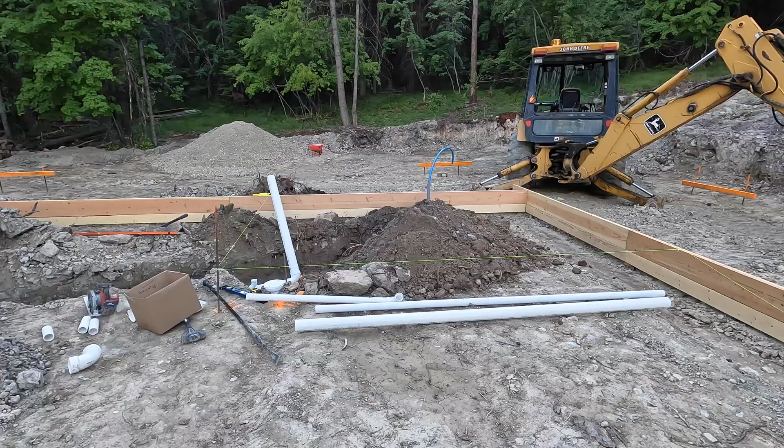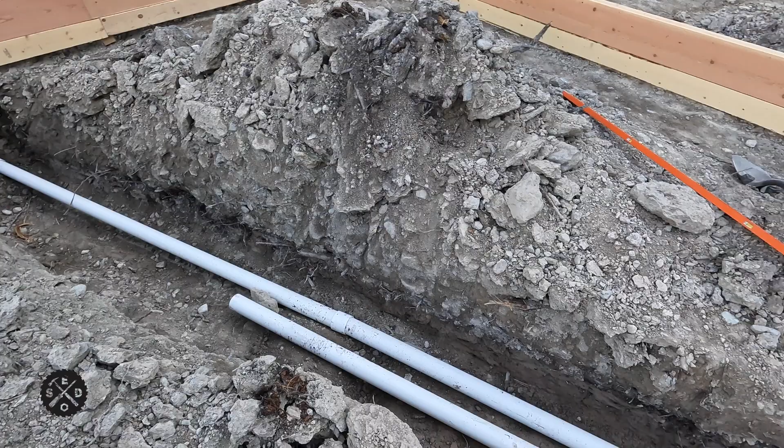Welcome to episode 6 of Building My Garage. So today I'm going to be digging in the plumbing for under the concrete slab. So all this prep has to be done before anything else can get done. So I wanted to kind of walk you through some of the process of how I'm doing it. Be sure to check with your local building codes to see what requirements are in your area before you do something like this. But hopefully this will give you some ideas of the process that I went through.

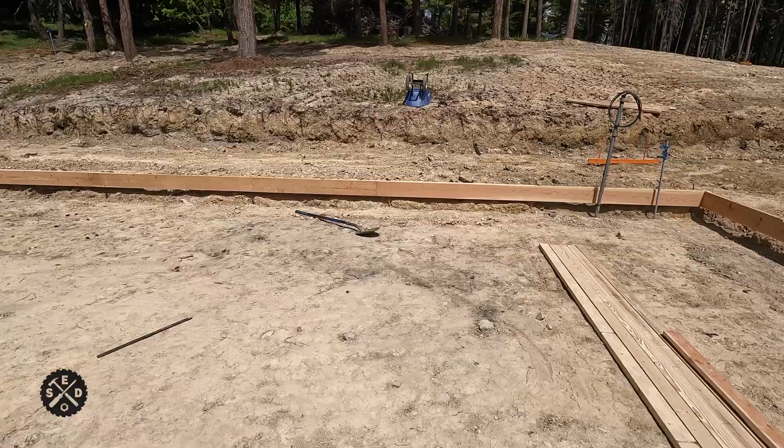Okay, so while I'm waiting on getting some more pins and stuff to finish up my form boards, what I decided to do is shift gears here a little bit and think about plumbing. I am going to have a bathroom in here with a stand-up shower, a toilet, washer and dryer hookup just in case I want to do that, for washing dirty clothes out here, and I want to have a utility sink. So that's the main things I'm going to have.

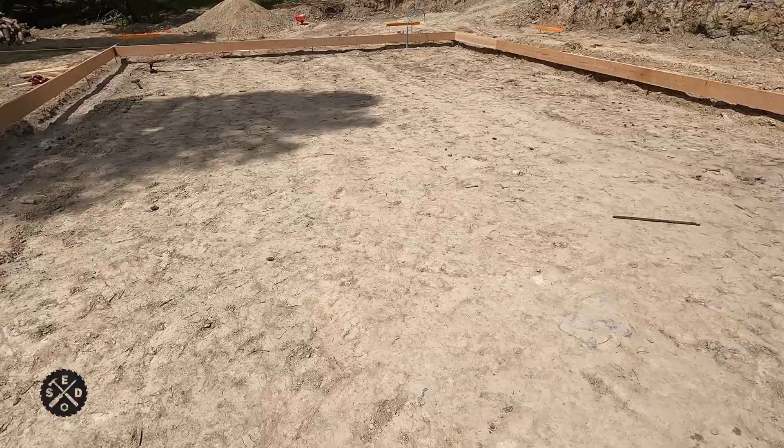I do want to have a floor drain under here where I'm going to have 2 garage doors in the front here, and I want to have a floor drain somewhere close to where the cars are going to be parked, 2 of them here. So here, it's kind of bright and sunny out here, and I'm not much of one for digital drawings. Never was good at that. So I just did a hand sketch here. Hopefully you can kind of get the idea here.

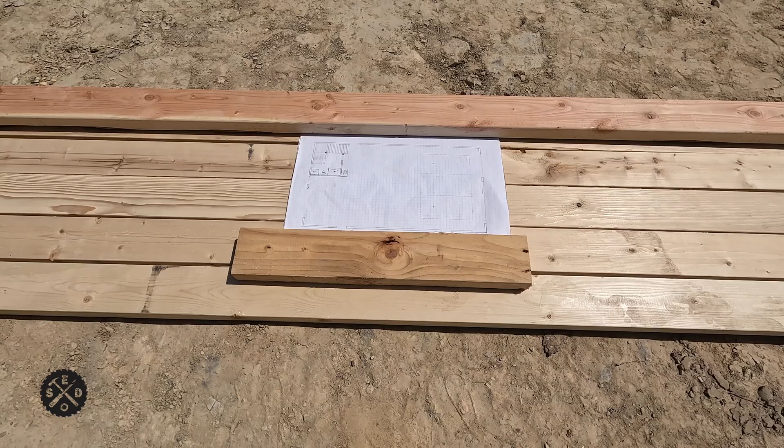Okay, so it's super windy out here. That's why I have this blocked here with 2x4s. But I wanted to show you a little bit here. So this is my floor plan layout. And then here I kind of sketched out where the cars will be parked. So I want a floor drain here, floor drain here. Over here I want a drain for the utility sink and the stand-up shower and the toilet here and the washer and dryer. And I'll probably do some kind of a drain back here in the mechanical room.

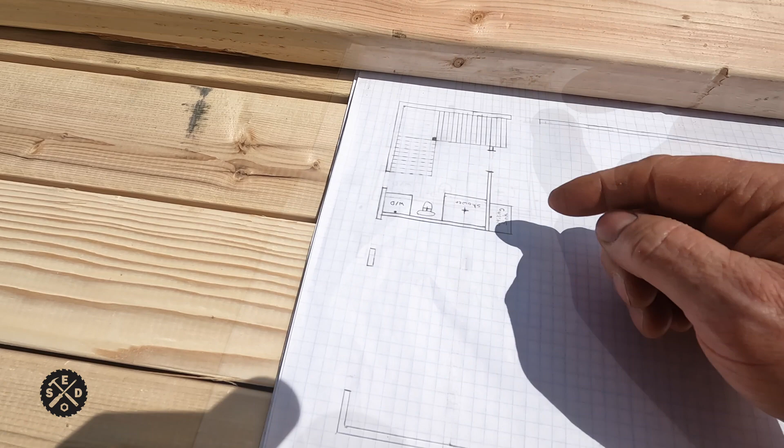It kind of just symbolizes the stairs going here. It's going to have a landing and then turn and go up, because upstairs I just have the center part of the building that's going to be used since it's an attic style truss. So that's why I'm doing this the way I am. So I'm going to get set up and get that laid out.

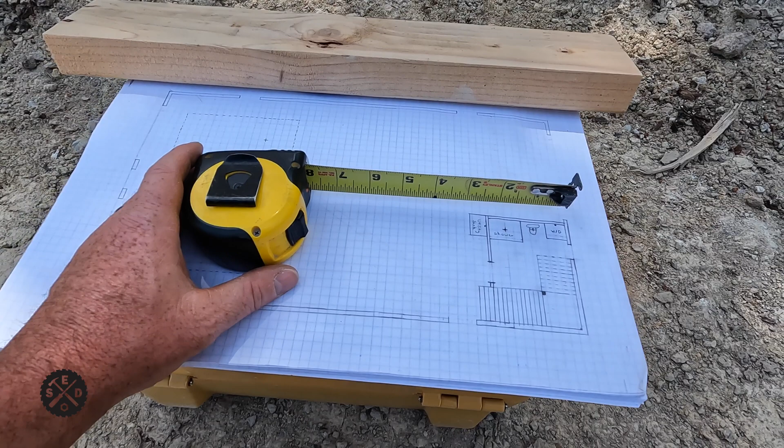Okay, so I moved to a less sunny location for doing this, and of course it's windy, so I still have to hold this down on that edge. But what I did is just use large graph paper, and I did 1/4 inch per foot layout on this. So what I can do is just reference off of the outside here. This is a drain kind of in the center of the washer and dryer towards the back side of the wall. Utility sink as well.

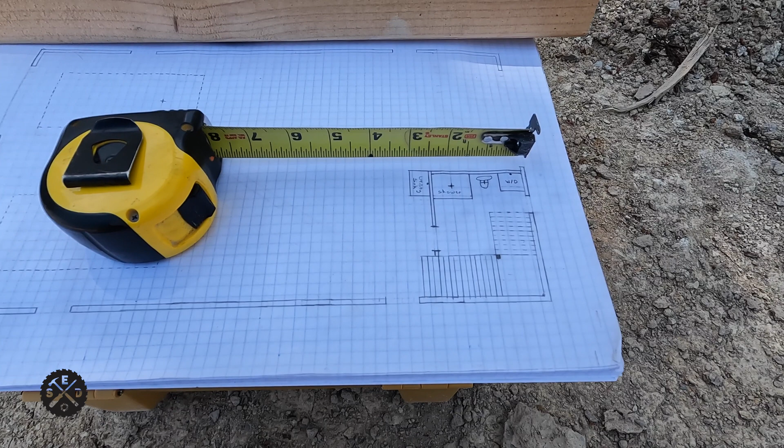I'm going to try to do that on the back side of that one. Then I got the toilet centered in there. So I'm going to try to reference this as close as I can. You can fudge the walls a little bit sometimes if you have to, like a little thicker wall or something, things like that, but try to go as close as we can.

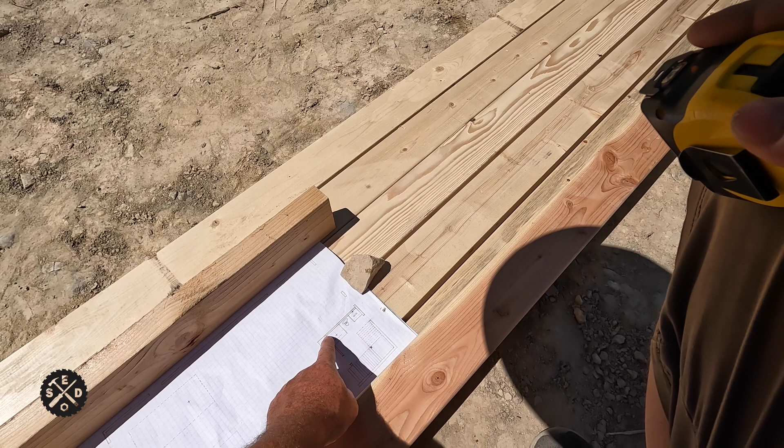Okay, so you probably saw me doing a little measuring earlier. This right here, I got this weighed down good because it's so windy, so I wanted to show this. So yeah, I want 14 feet from the outside here, 14 feet to the center of this wall. That's what I'm going to do for reference, because I want this plumbing to be inside the wall. So that's what I'm going to do, is measure that.

So just to show you really quick how I would do that. In my case, since the outside of the building is going to be 1.5 inches back from there, I'm going to measure outside just so I have a good place to reference to. So there's 3 inches, so I actually have to go 14'3" to the center of my wall.

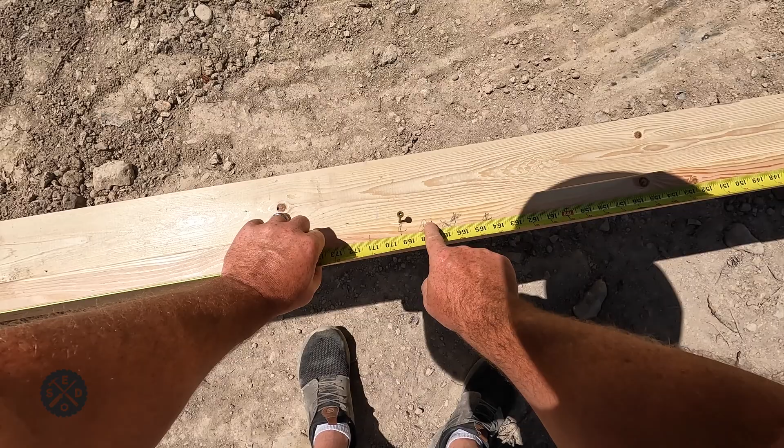So this is the outside of the wall, so it's a 2x4 wall, 3.5. So this is the center right here. This is where I'm going to hook my string up. So now I got to figure out where this wall is going to go. I could do the 1/4 inch per foot. We'll just go with an even inch so you can see there.

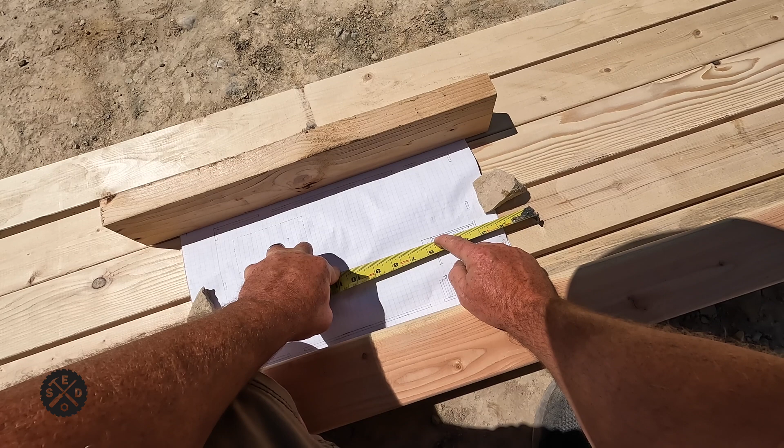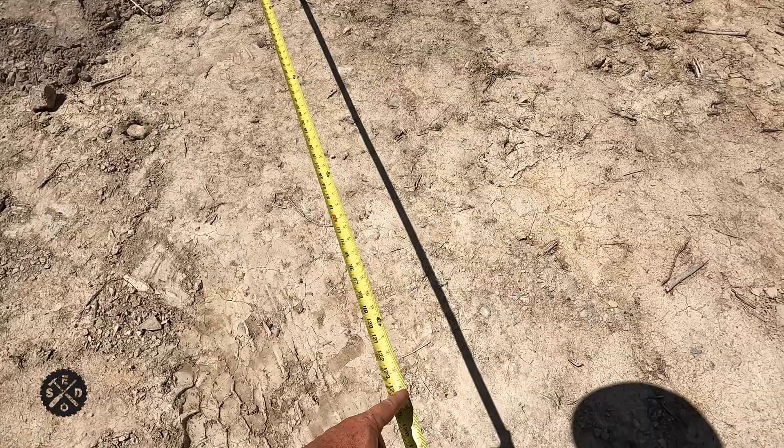So that's 4, 8, 10. So from the outside right to here is 10 feet. So that's 10 feet to this side of the wall this time. Now I want to go 10'3" since I'm hooked on the outside of that, plus the 1.5 inches. Hopefully that doesn't confuse you. But now I got to go 10'3", and this is where I got to put my stake, and I'll double check the length this way. That's how I figure out exactly where this wall goes.

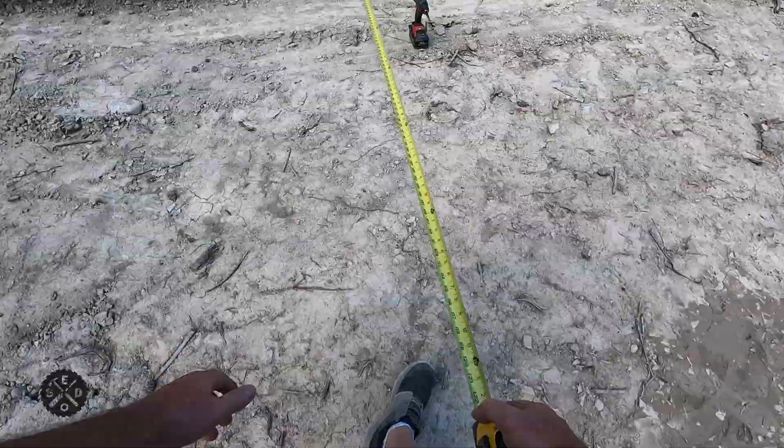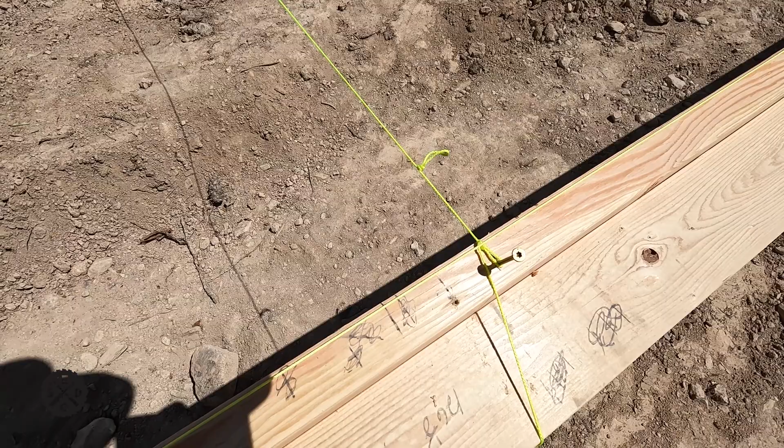So I ended up doing a little different. I ended up going to the outside of the wall instead. You can see right there. So the example that I showed earlier, going to the center of the wall, I decided to go on the outside because I was thinking about it. The center of the wall is where the pipe's going to go, so the string is going to get in the way and going to get pushed around.

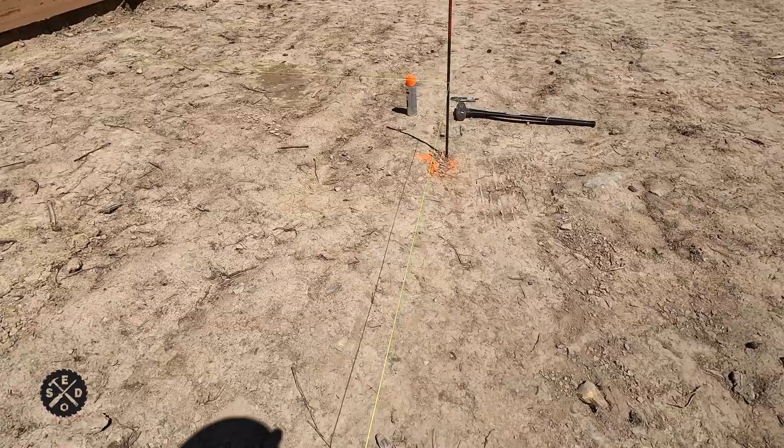So this way I decided I'm going to stay on the outside all the way around, so I do it the same every time. So this is the outside of the bathroom all the way around. So I know that the center of the wall is going to be 1.75 inches since it's 3.5 inch wall. So that's where I got to shoot for to put my pipes. So a lot of random stuff going on out here, but I'm working on getting the plumbing laid out.

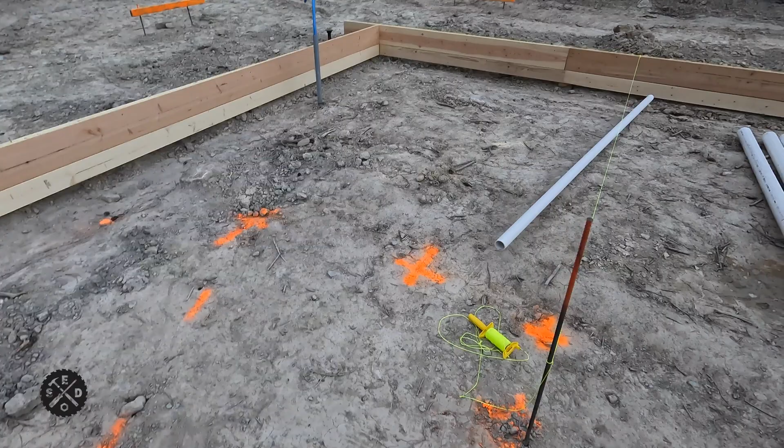What I'm doing here, I think I showed you on the thing, but utility sink, drain over here. This is where the wall is going to go. I marked this wall out, which the string is down temporarily right now. But I'm going to do a stand-up shower, then I'm going to do a toilet, and I'm going to do a washer dryer. This line right here is a septic line going out, and right over the bank there I'm going to do a vertical step with a clean out down there to the tank.

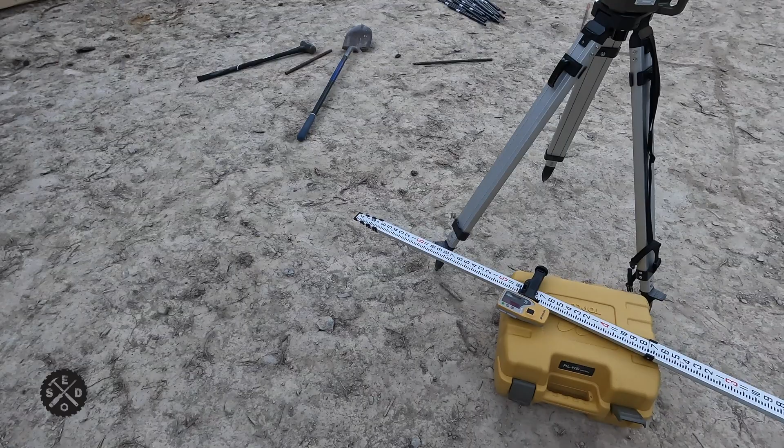And so right there, I know what the distance is in this. It's 45 feet. So what I did is I used my laser transit, this handy thing right here. I don't have it turned on at the moment.

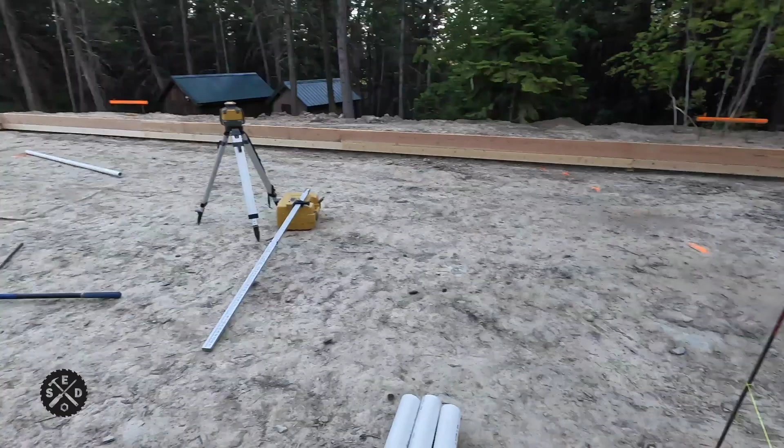When we did the house over there, I did the plumbing first before doing any of the rest of it. But for this, I decided I'm going to try to do it. And this one's not quite as big, so I think I can reach. So for this part, I'm going to try to reach for the first couple of feet, maybe 6 feet of this, and then I'm going to reach the rest from over there.

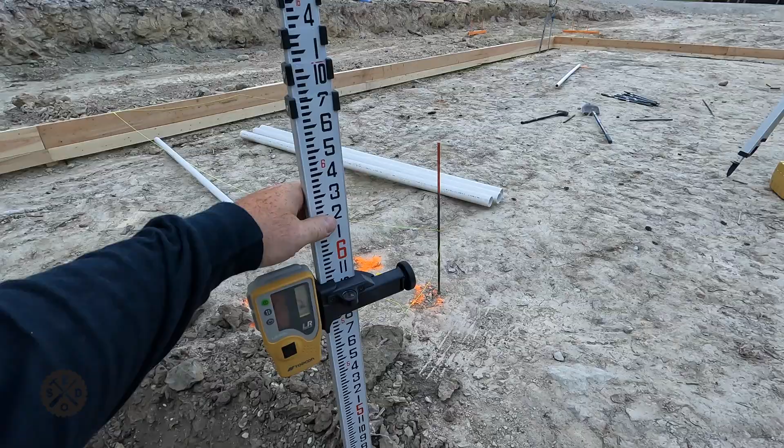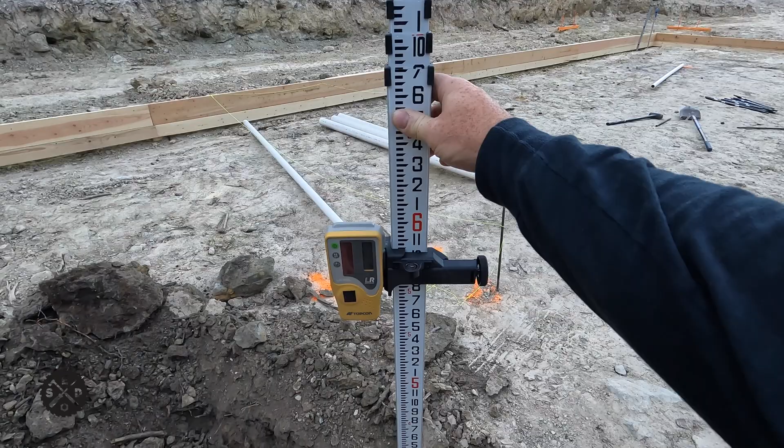Now what I did in this case, since I knew I wanted to go down 2 feet all the way out through there, I found out what the grade was before I started, and then I set this 2 feet higher, so that way it goes 2 feet lower. You can tell I'm pretty much right there. So now what I'm going to do is dig a little ways, and I'm going to adjust the transit according to the distance I go. So I'm going to kind of check the grade as I go.

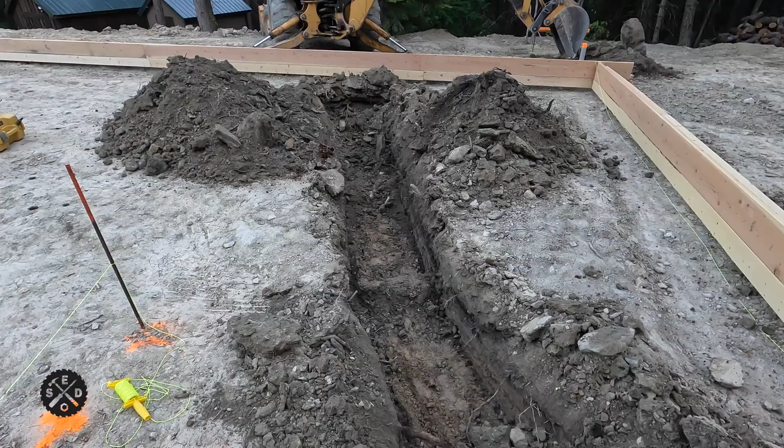So if I go out, say dig 10 feet out or so, then I'll know that I need to go down another 2.5. So later you'll have to do some hand digging to get this exact, but this just gets it pretty close as you're digging along. So you can see where I started there. I couldn't quite reach with the bucket, but I can get that by hand easy enough. So I went out about 10 feet and moved the grade stake 1/4 inch per foot to that location and right on. So I'm going to just keep digging.

Going to be really careful around that form there. Probably going to do a lot of hand digging, so not going to get super close. So that's the one con of having your forms up now. But like I said, the pro is you have the forms in place to measure everything off of. And if you don't have to go this deep, it's a lot more ideal. This is pretty deep. Just keep digging along here.

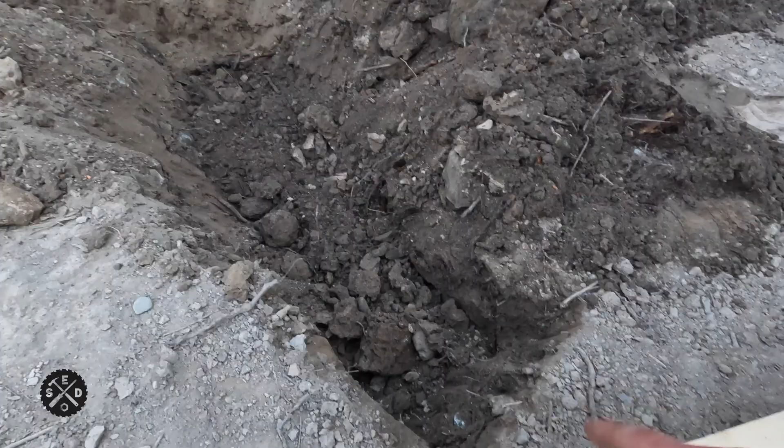Pretty much got everything dug that I want to for tonight. Got that dug over there to the footer. And then I didn't want to disturb this too badly. So I shot grade right on this side, then I came over here. Of course there's some loose stuff. I shot grade on the other side, got that dug all the way out to there. So that's where I'm going to end it for now.

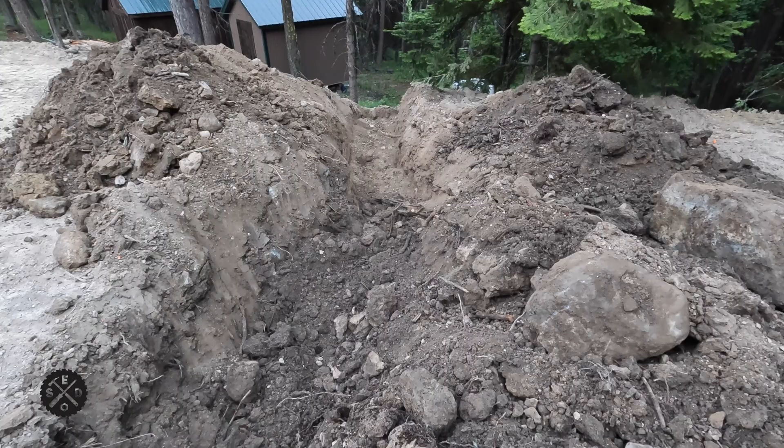So it's going to go down the hill on the other side from there, but that's where the vertical step's going to be. Now I just got to dig all this by hand tomorrow when I get done with work. I'm just working on this in the evenings and weekends for the most part. And then I should be ready to start figuring out plumbing.

So a little bit has happened here. Been working along. Remember I dug over here. This was a couple nights ago. I've just been working on this in the evenings, trying to get this prepped a little more before I show you the rest of the process. But you remember this string line that I had set up for reference? Still here, along with all my other stuff sitting around.

There's so many parts and pieces that you need sometimes, so when you're doing this, get extra and just return it when you're done, is my advice. No matter how many you get though, you're gonna end up going to the store and getting some more, seems like. There's always something. So really quick, you remember how I had said that the toilet was gonna run out by itself?

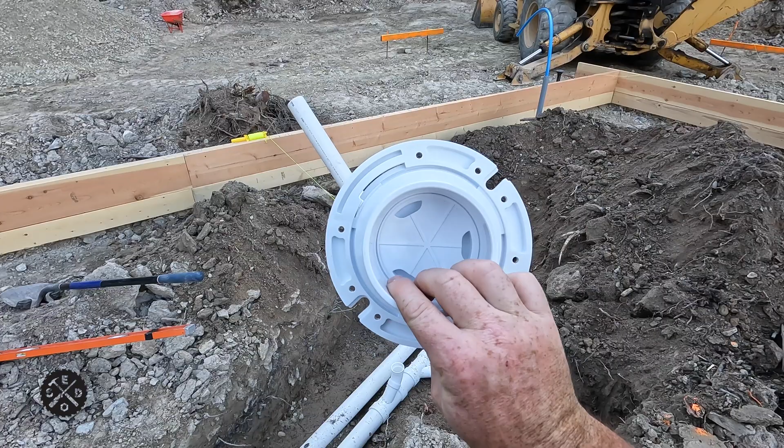So I'm coming up with a 4-inch pipe into the concrete because I want to be able to use this and slip inside the pipe later. The 3-inch pipe can either fit inside or the 4-inch can fit on the outside, which is very common. Since I'm going to run it long and cut it off later through the concrete, I want to get this kind and have a 4-inch so that way I can cut it right flush with the concrete when I'm done, set this on, and I'm good to go. But to do that, you need to have a 4" by 3" if you're going to go to 3" anyway.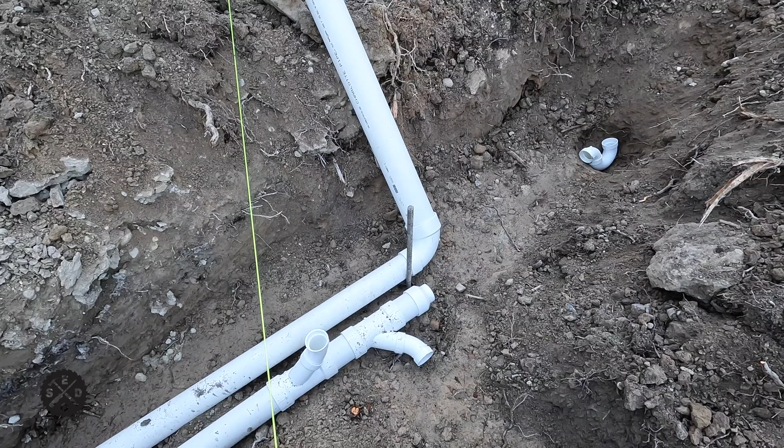For this example, I'm running a 3" line, the one furthest over there, and this is called a closet elbow, I believe, a 3x4 closet elbow, if I'm saying it correctly. I'm just putting this here temporarily for now. What I'm going to do is put another one like that, a Y, 3x3x2 Y, with a street 45 and have it pointed up, and then it's going to be a vent right here. I'll show you a little more when I get done with this, but there's going to be a vent right here coming up to vent this.

Same with this one. This is the other line for the gray water. I want to vent this up here, same spot, right beside it through the wall. Then I'll end up tying them together and go through the attic. Over here is where the shower is. So I'm going to go off to there, and then I'm going to reduce to a 2" and go straight over there for a floor drain in the mechanical room. I just want to have a floor drain back there. And I should never send anything down there that is going to clog it, so I'm not too worried about that.

In here, since you don't want any hard bends to tie the shower in, I'm doing a 3x3x2 Y, then a street 45, same as this one, and it's going to go that way over there. I'm just going to do a 90 there and come up because it's going to get a P-trap below the tub shower, so that'll take care of that. And then this is going to come up, it's going to be a vent. I'm going to come up like this inside once the wall's up, and I'm going to do street 45s off to the side, and this is going to go over for a drain for the washing machine. This is going to go over for a drain for the utility sink, and then straight up is going to be the vent. So that should do it.

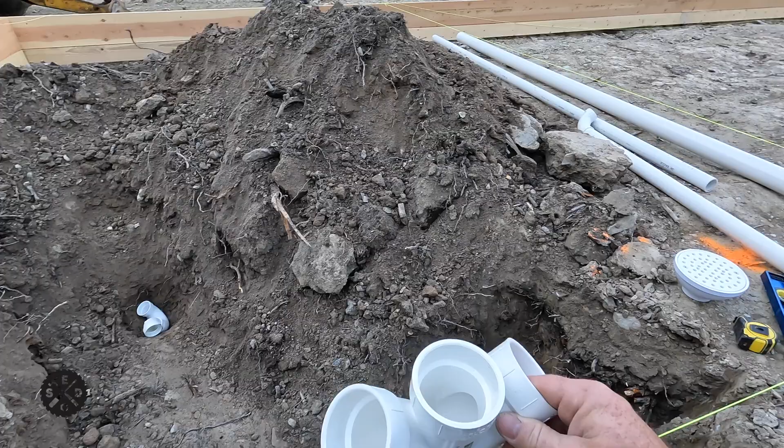So what I like to do is I'm setting this up, I'm just putting some dirt in to kind of fill in to the right height. I've showed this trick before, but I'll show it again.

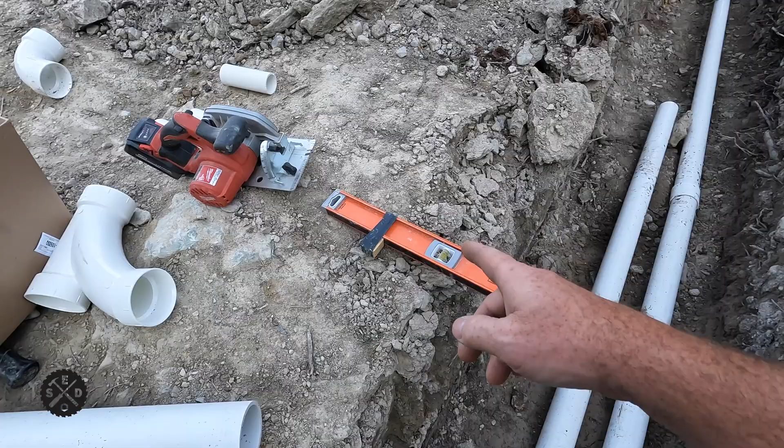So for example, if you want to drop a 1/4 inch per foot, this takes the guesswork out of it. This level is 6.5 feet, so I put the block at 6 feet. But I put a 1.5 inch block because 1/4 inch per foot times 6 is 1.5 inches. So I put the block right at 6 feet, and then on this level, for short runs, a 2 foot level, I needed a 1/2 inch block. So I just taped it there with electrical tape on the end.

So you hold your level right on the upper end, and on the lower end you put the block on there, and then if you're close, it should read right on level. See that? It's really close right there. So if you put the block on, you can read exactly level with your level. So I just thought I'd share that with you guys.

So as I'm going along here, what I like to do is dry fit everything first. Make sure everything is in place before you start gluing anything. Just make sure that everything is going to fit, everything measures out, because you can put these things together. You don't want to put them together too tight, but they do come apart pretty easy. One thing I was going to talk about is when you're dry fitting everything, how do you figure out how to measure things?

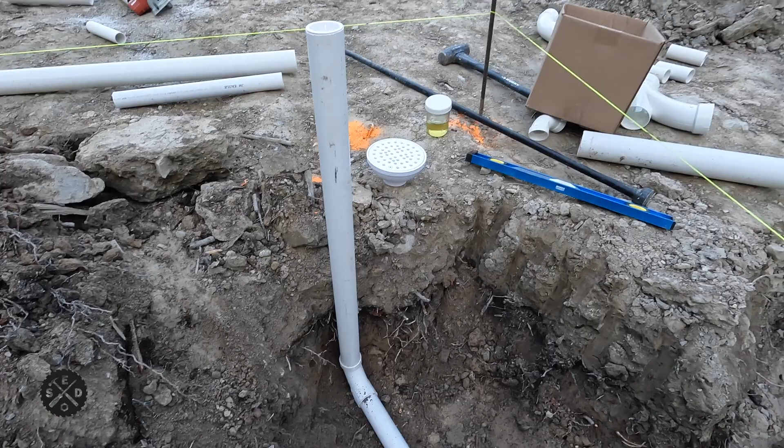What I like to do, say for example here where this shower is, I like to put maybe this upright piece right here with a 90 elbow on it. You want to use a long sweep 90. But what I like to do is set it right there and kind of measure off the string and see kind of what you want. I want 24 to the center, which I have. So then like my example, coming from the outside hooked on, I wanted to be 8'6" to the center, which I'm really close right there, 8'6".

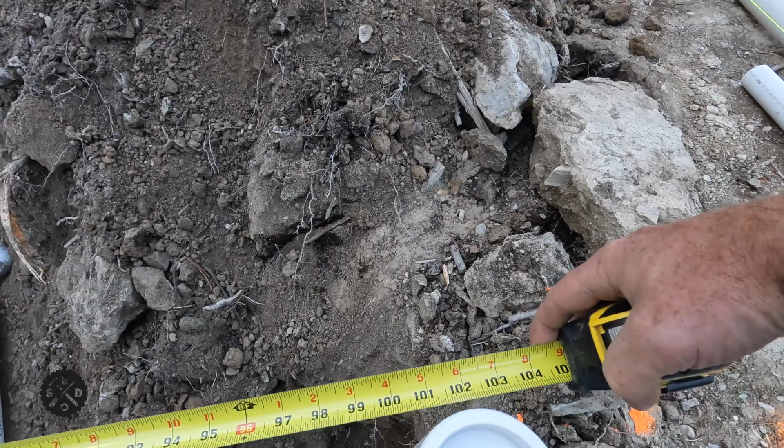So what I do is hold it in place there. When that's sitting right there, you can measure inside the fitting or figure out how far it measures into the fitting. Or you can measure tight in between, like where your tape measure butts up, and you can measure tight on this end. So say for example, that's 26 3/4. Then you would measure what this lip is right here, which is just a little over 3/4. See right there where that lip is? That's where the inside is. And then you could do the same there, figure out what that is. As long as you know this is in place where you want it, center-wise, then that's how you measure.

And so in this one, it goes right into that part there when it's empty anyway, and right to this part. So what I did is just measured right from there to that point, and then I was able to cut that piece once I confirmed that that was in the right spot. So just things like that. Usually I cut the upright part, set it right where it needs to go, and then go from there.

And then this one was the main one that I knew had to go somewhere. This vent is coming up in the middle of this wall. This is going to be a 5.5 inch wall, so I want it 2 3/4 to the center of the string. So I'm really close right there. This has a little bit of movement in it that far up, so I got it really close. So this one I knew I had to place exactly because of this wall right here.

And then this one, I knew I had to figure out where the tub goes, the shower, and so that pretty much had to get placed. But since this can turn a little bit, you can just lay it out there before you put this piece. I had these little short pieces already cut, so I just put some in that I had. What you do is lay this one out on the ground after you discover where this one goes, and then you can measure this in between and dry fit it in. And here I just reduced it to 2 inch so I could get that floor drain. Things like that you have to think about.

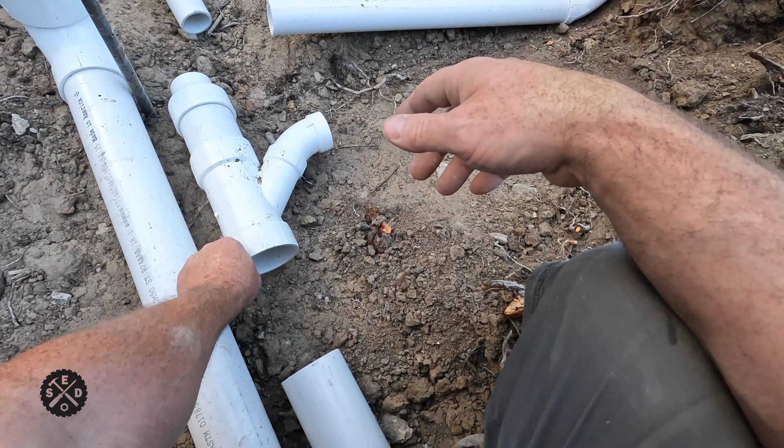Once I get this in here like this, I need to have a slight elevation like this. I would try to get everything ready and then glue the joints all together at the same time. You have to move quickly because it dries fast, but I'll try to show that a little bit as I go along.

So first, like I said, I like to do the ones like this that don't matter, and if they're really dirty, this one's not too bad, but I like to take a paper towel or a rag or something and clean these first, get the dust off of them, because from working on them, they get a little bit messy.

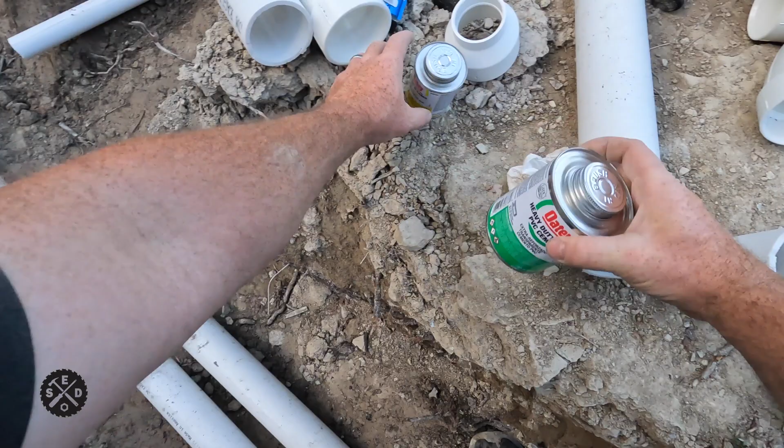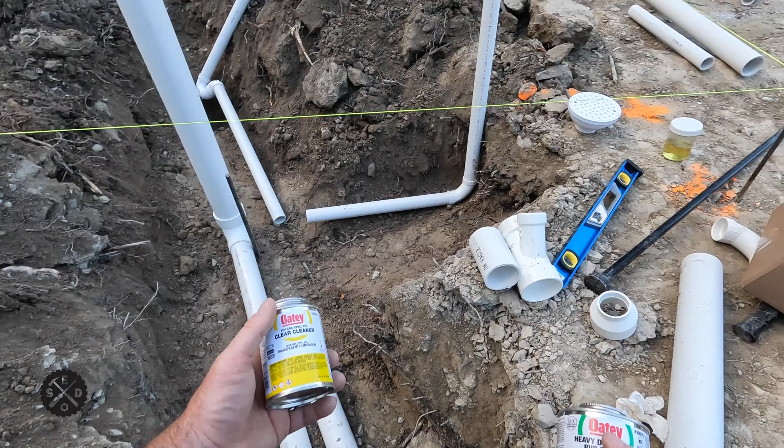So for example, this one, if you've never used glue and primer before, I'll show you what I use. A lot of times, you can use some different ones. I like to do the heavy duty stuff, if possible. I like using clear stuff as well, just because it doesn't make it near as messy. Not that it's going to matter here, because it's not going to be seen. And sometimes inspectors like to use purple primer because they know that you cleaned it really well. That's what the purple is for, so they can see with a glance that you did it.

So for example, you use the primer first and put it in here very generously, trying to get it all over. So you want to clean that really well, and then that will dry. Just in a few seconds, it'll dry quickly. This pipe here wasn't cut the nicest, but should be okay. So you want to clean a good enough area where you know that the glue is going to be in.

Once this is primed, you want to make sure to not get it to touch any dirt until you're ready to glue it. Now I got to set this somewhere. I don't want to get it in the dirt, but I only got so much stuff to work with here. So every connection needs to be cleaned really well. Now you want to close this up when you're not using it. That's all primed, ready to go.

So now I got the glue here. You can be generous with this. You don't want to get too much, but you can certainly be generous with it. Then I like to put it in and turn it a little bit just to make sure that its glue is smeared all the way around really well. And just like that, within seconds, it's set. The only thing you want to make sure is that it doesn't push out for some reason. So I like to hold it just for a little bit.

Sometimes you can put it on the outside here, but I also like to put it inside the fitting. Now if you get too much glue, it just gets messy and gets everywhere. And wow, that bit fast. Now if you're using this quite a bit, you can just set the cap on top without screwing it in. But if you're not going to use it for a while, I'd recommend screwing it because it does dry out.

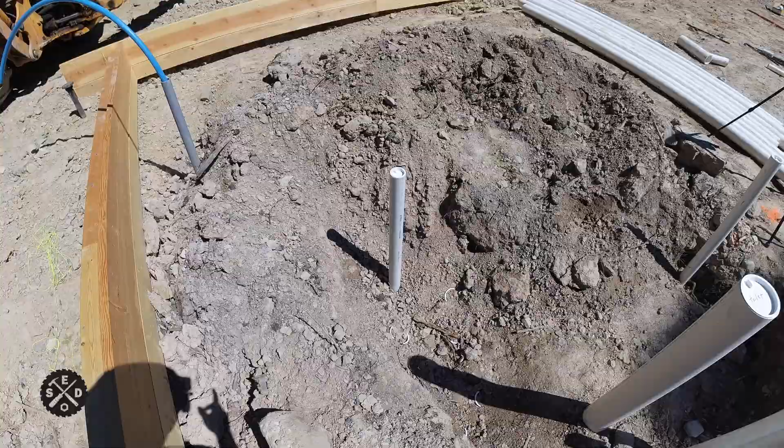Okay, so this is how far I got so far, just to show you in my example what I had to do. So I got floor drain mech room there, which I had told you about. I got the toilet right here, and I got the 2 vent pipes right there. One's going to be a drain as well. This is my shower, and so this right here are my floor drains.

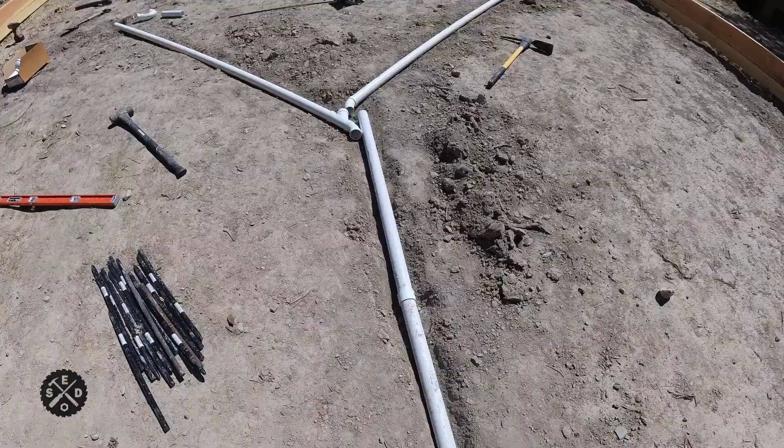So for this, you can kind of see, I just got this dry fit in here, and I leveled it as I went. A little bit extra long here still, but that's what I'm going to do to transition, because I'm going to have a drain over there and one over there for parking 2 cars in here. Figured that should be good. Then I'll have this Y, and that's what I had to do, is just do 45 street elbow here and here to get it lined back up, and that should flow good, I think. So I got everything sloping 1/4 inch per foot all the way down to here.

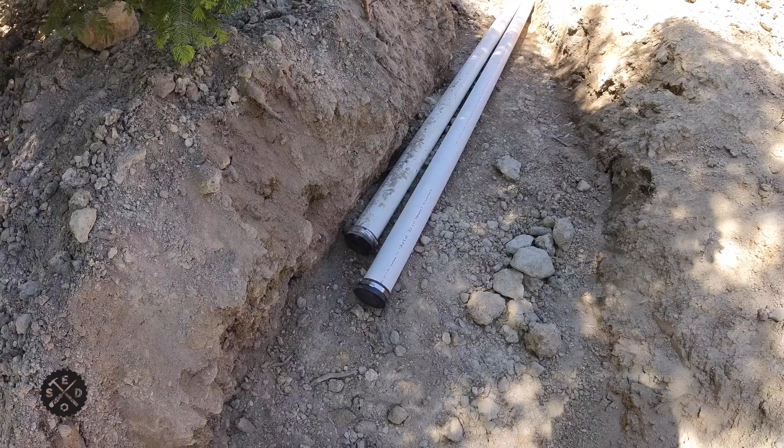Okay, so we ran the pipes out to here for now. I put these rubber Fernco caps on them. You can get regular pressure test caps, the red ones with a rubber gasket on them, but these are a lot cheaper and they seem to hold good, so I'm just using those to pressure test them. So I got the lines coming out here.

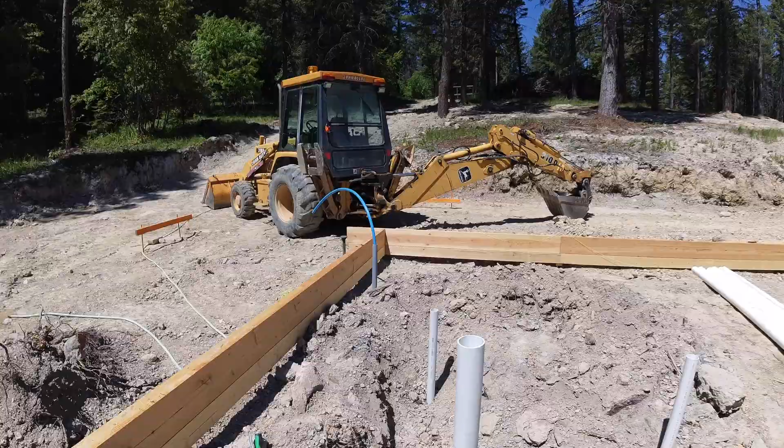So what we did, since I have that new hydrant up there above the backhoe, we wanted to pressure test this. We filled the septic line up, you can see right there, but this is right below it. This is the vent, so this is as full as I could make it. And I'm testing it for a while to see that it's holding, make sure it's not leaking anywhere.

As far as the drains go, I'm actually waiting on FedEx to come so I can decide which floor drains I'm gonna do. So all that to say is, this is the highest point. And since I don't want to put my P-trap yet until I'm committed, what I did is I filled these up. We kind of did it with this till it started coming out, but the water is sitting right there at the pipe. So that's as full as I can make it right there.

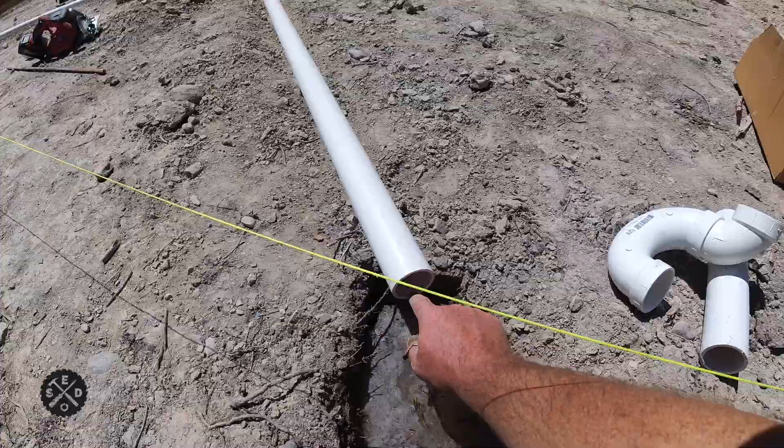So pressure testing it all. It's holding, it's looking good, not leaking at all. So we're gonna let that sit for a while. And then if everything checks out properly, then we're good to backfill.

All right, guys, so earlier I had showed you I did a pressure test and all that. Everything turned out great, so I started filling back in. And I wanted to bed the pipe. I usually like to cover the pipe, pack down around it really well, make sure if there's any low spots that you get that filled in nice so that the pipe lays nice and straight and flat along with the slope that you've got.

And so I like to bed it really well, and then before anything big gets on it, there's about 6 or 8 inches of dirt on top of this, I would say, now that all this big stuff is in here. But then I try to pack it down in layers as I go. I got a plate tamper I'm going to try to bring in here and run over this too. So I might try to break up some of these big chunks because they're really big.

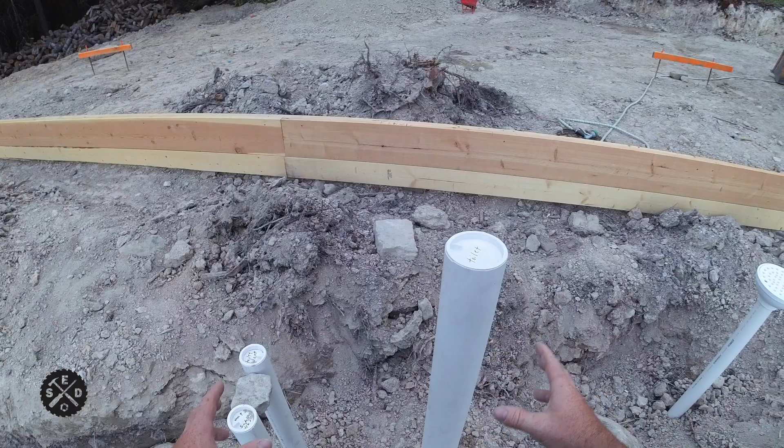And then I also would recommend that you level these as you're putting dirt in here, like the toilet pipe here. I like to level it both ways. And these you can do as well if you want. It's not quite as critical as long as they end up in your wall is the main thing. For the shower drain, I'm leveling that one as well. So just kind of do it as you go, as you bring dirt up around it and pack it around and stuff.

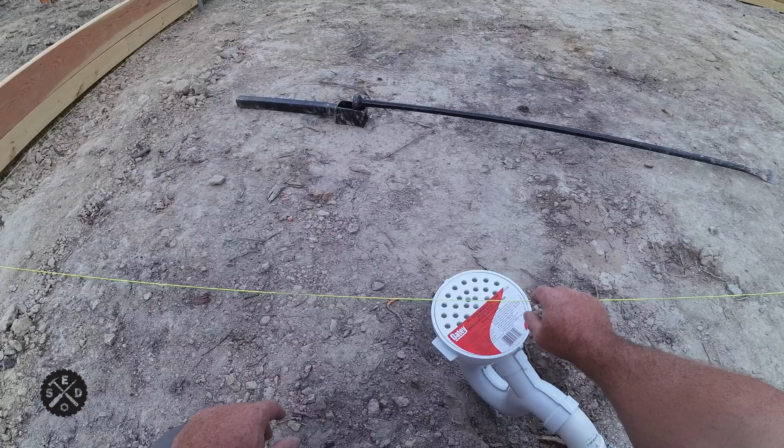So for these floor drains, these are just sitting here, but this is what I ended up with. So what they are is they are a floor drain with a P-trap built in. To get it up to height, I want to end up being about 3/4 inch down from floor height is what I decided. So I'm just going to have them slope a little bit around here, so when a car is parked here, it'll kind of drain into there, is my thought.

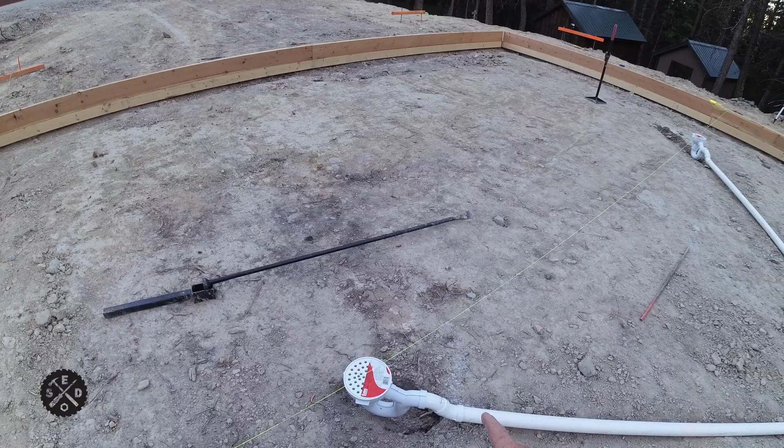Since I already had these drain pipes in and I wasn't sure which floor drain I was going to use, then these showed up. I kind of like these because they have a built-in P-trap, but then they also have a rubber plug in there and a clean out. So if you ever have problems, you can clean this drain out.

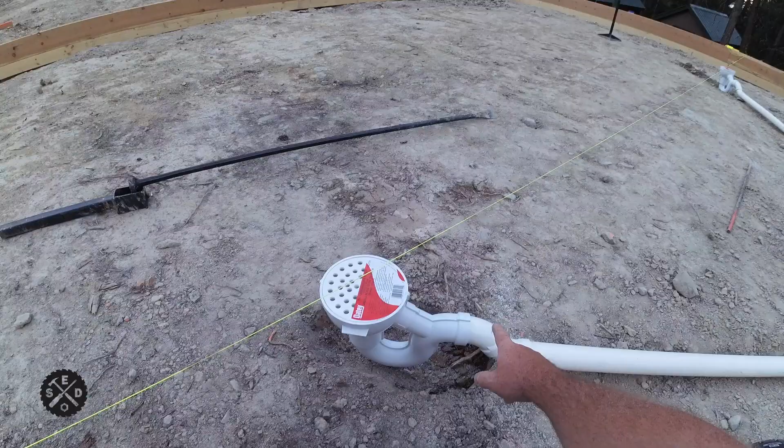With this 45, it should be okay. It's got two 45s here. It's gentle enough. You should be able to make that with your snake if you need to. So I wanted to show you one more time how everything turned out before gravel goes down.

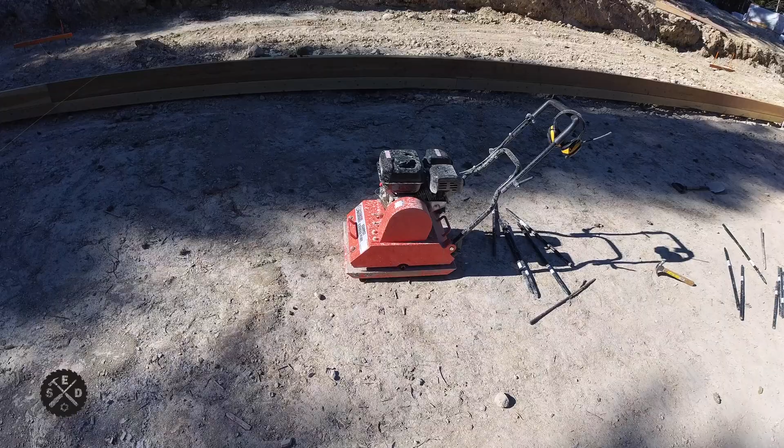So what I did here is I filled the dirt in layers and I packed it down. I wet it down and packed it down. I got myself one of these compactor plates. I ended up just getting the Central Machinery one from Harbor Freight, but for the price, it does the job. It runs good, so I think that's going to do the trick for me.

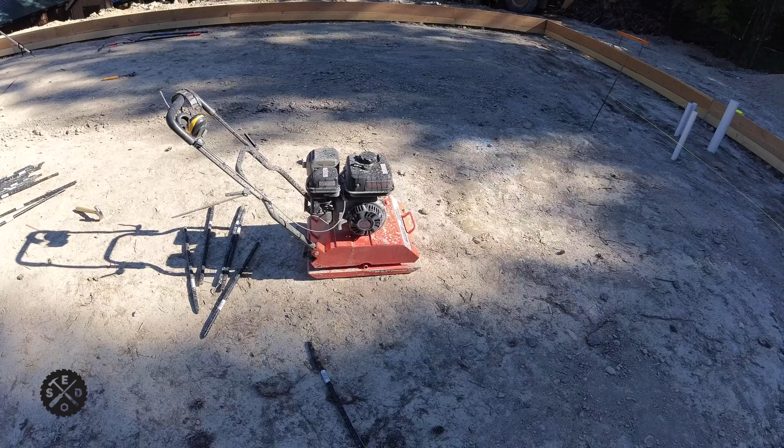So if not, this seems to be a really pretty good machine so far. This is my first time using it, but I'm going to use it and test it out. My thought was I could rent this, but I have to use it so many different times since I'm working evenings, weekends, and stuff. So I decided just to buy it instead of renting it because I am going to get a lot of use out of it, probably in the future as well. So that's kind of my plan. You have to weigh that out, whether it's worth renting or not for what you're doing.

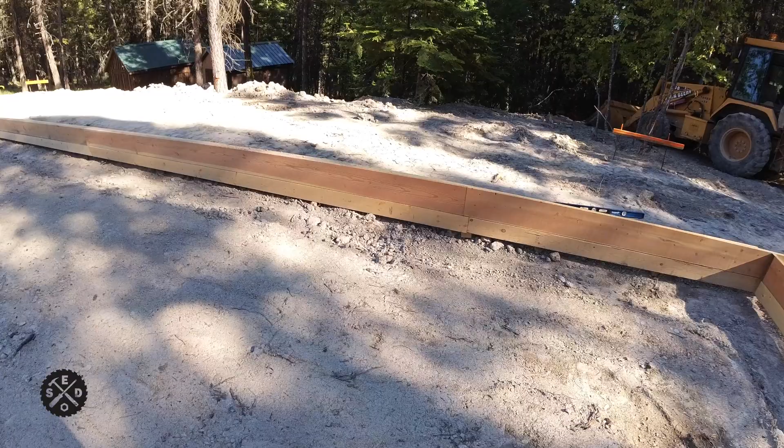So anyway, I used it on this. I put the dirt in layers, and it was such a hot day, I didn't time lapse all that. And I was kind of in a rush, actually. So I ended up just putting this in. I filled the ditch in on the other side over here. And I got this in, and I packed it down really well. You can see it packed down nicely. And I think it's going to be close enough for when I put gravel in here, because I'm going to bring in quite a bit of gravel.

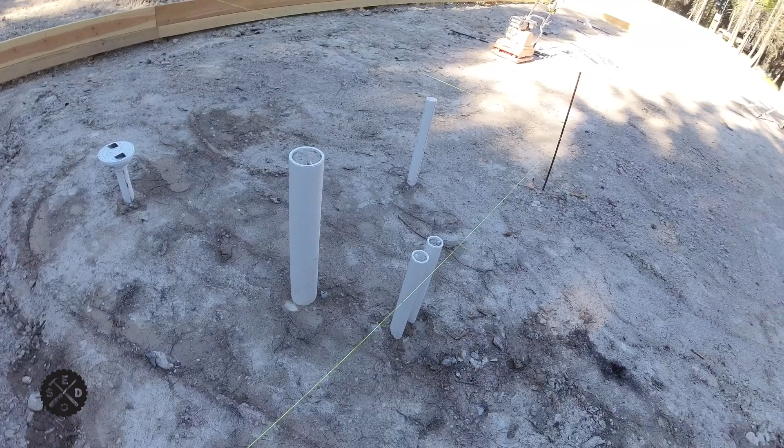Did all this, got it in layers. I packed it down with the compactor plate, like I said, and then I wet it down really good. Not to repeat myself too much, but I also set the string back up here in the right spot to make sure everything is in place before I did the final round. I had to do a little bit of straightening, but these ones will end up inside the wall, just like I had hoped. This one's a little bit further this way, but it's within a 1/2 inch of the other. So I think that should be great.

Toilet's good. Floor drain. So I set that floor drain height with the transit. I ended up going with the transit level. I did a string as well, but I confirmed it with the transit. For the mechanical room here, I wanted this one a 1/2 inch down from what the floor height is going to be. So I confirmed what the top of this was based on the floor height, dropped it a 1/2 inch.

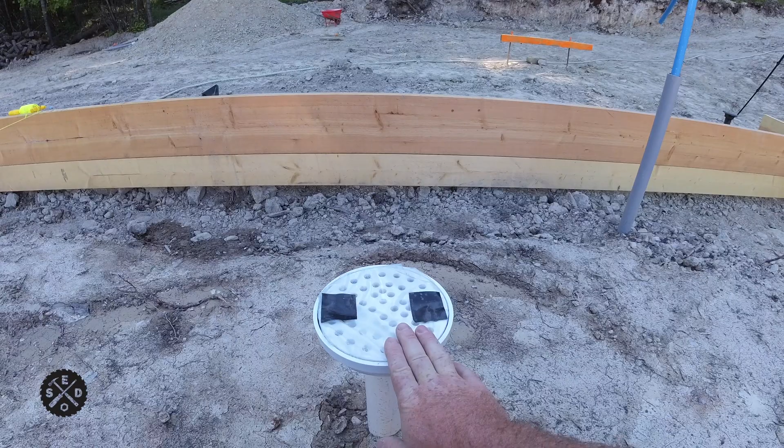And then what I did, you can't really see it the best here. This is kind of a trick that I thought of. Hopefully it's going to work good to keep the concrete and the dirt out when we're pouring, but the main idea is the concrete. I just used a Ziploc bag, a quart size I believe it is. I cut the top off, folded it around in here so it's inside and out, then I screwed it back into place. It has 2 screws. Then I covered the screws with some good heavy duty Gorilla duct tape, because I don't want the screws getting full of concrete when they pour this, since the screw heads are still exposed. So I just thought I'd share that little trick with you guys.

I think I'm ready for gravel. Put that in layers as well. Pack it down with that thing. I usually wet the gravel down really good as well, so it packs really good. That makes for a nice base.

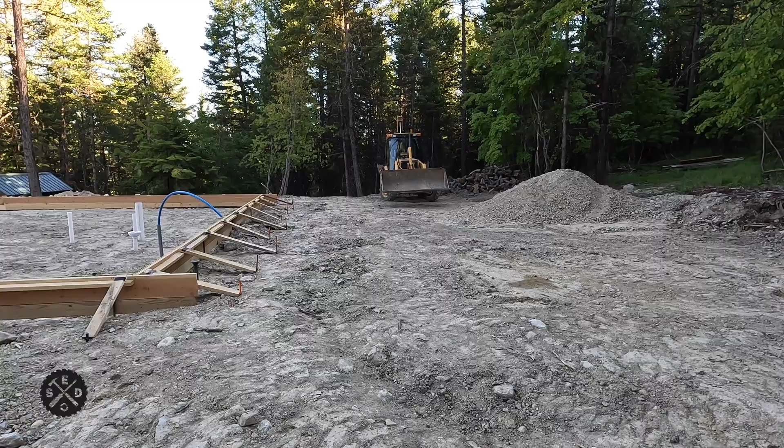The next video I'll be working on getting the rest of the foundation ready, getting the gravel in here, getting it finalized, and getting it ready for putting insulation down. Keep your eyes out for future videos.